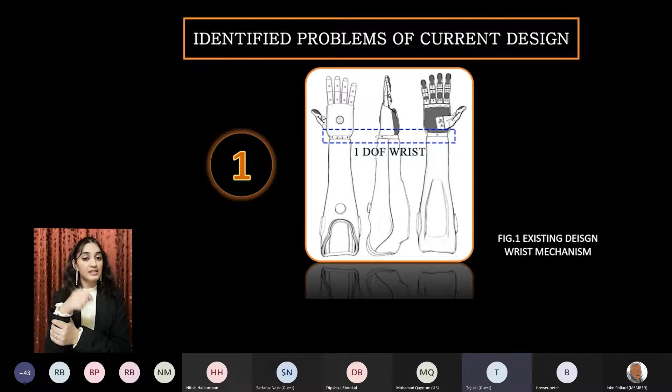Second problem that I identified was the thumb. Thumb plays an important role. As you all know, we can grab or grip anything with the help of this thumb. But if this thumb is not having a good grip strength, a lot of things are not done. So you completely become dependent.

And the third problem was the tendon cables. This is having its own pros and cons. It's easy to achieve a mechanism where you can do this close and open, but the long cables involved inside have power transmission loss. Because of this power transmission loss, there is some kind of force imbalance, and that might lead to gripping power or gripping strength that could be not as strong as a normal human hand.

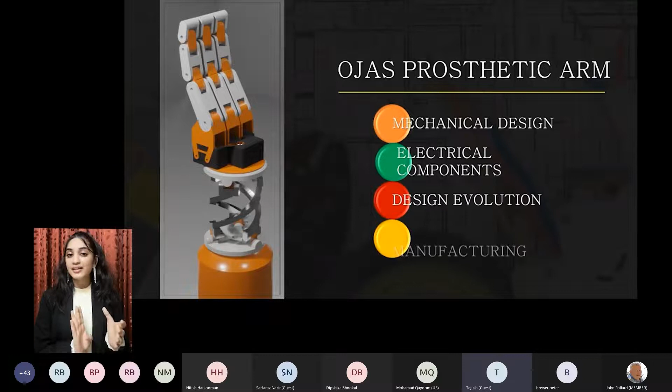So these are the 3 identified problems from the low-cost prosthetic arm. To come up with a solution is what we are having here, the Ojas prosthetic arm. Under this, we have 4 categories. We'll be focusing mainly on the mechanical design, electrical components, then we have the design evolution, and finally the manufacturing. From all these things, we can identify what is the improvement from the Ojas prosthetic.

To start with, we'll start with the mechanical design. We are mainly focusing from below the elbow. That's why we have wrist and finger mechanisms considered in this case. So this is completely based on mechanical design.

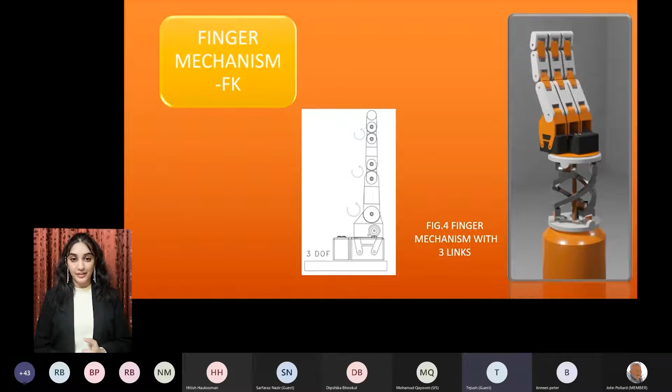Finger mechanism is basically, instead of going for a tendon cable, how about we go for a 3-link mechanism? By using a 3-link mechanism, it is easily achieved to get 3 degrees of freedom. So this is how it will look like, and this 3 degree of freedom is achieved by actuators that's placed in the bottom. These actuators will help in the forward kinematics mechanism.

Now you might wonder, there's only 3 fingers. Where is the 4th and 5th finger? Well, to give you an equivalent mechanism just like the thumb, we're going for this mechanism called the shift mechanism. In this shift mechanism, there is a servo motor which is connected to only 1 finger, and this finger has freedom to move from 0 to 180 degrees. It will easily help you in grabbing or gripping anything, for example holding your laptop, or maybe carrying a bag, or opening a door can be easily achieved by this.

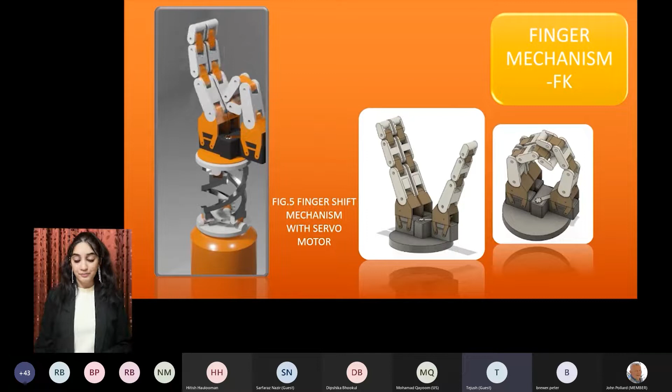Next is the wrist mechanism. In this wrist mechanism, to replicate exactly like a human arm, after a lot of literature reviews and research, I've come to the conclusion that a quaternion joint would be the best one.

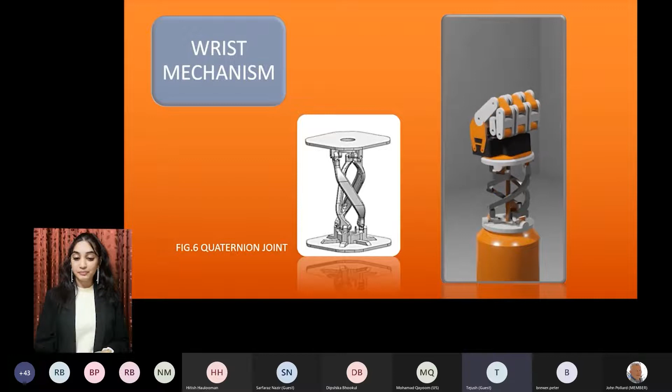The quaternion joint is compact and completely based on rolling motion, which easily helps us achieve 2 degrees of freedom - that is, rolling at the same time as turning around. This helps us achieve front, back, and sideways motion just like a human hand.

Coming to the next point, the electrical components. We start off with a power source, exactly like a mobile phone where you have to charge it. We use lithium batteries here - chemically safe, long lasting, and fast charging. Compared to a lead acid battery, this is 60% lower in weight, so we prefer lithium over lead acid batteries.

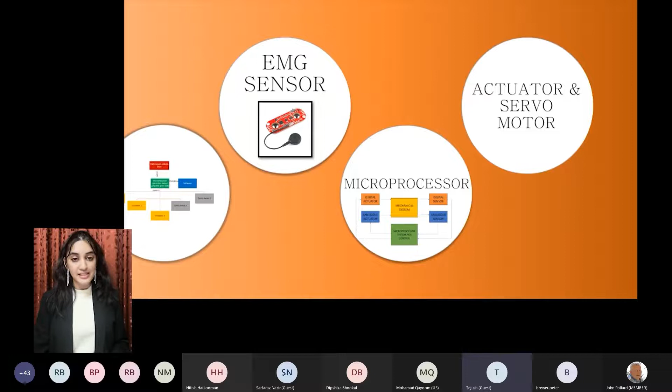The next one would be the workflow. I've explained the finger and wrist mechanism, but how are they going to work? It's with the help of the electrical components. We have a sensor that senses all the signals from the muscle, which will be given to the microprocessor, and that will give the data to the actuators and servo motors.

The sensor being used is basically an EMG sensor, electromyography sensor. This sensor can easily detect the muscle signals. The muscles always have signals that come from the brain with the help of nervous signals. The nervous system helps us get all these signals to the end of our hands or legs according to our need. So this will detect these signals and give it to the microprocessor.

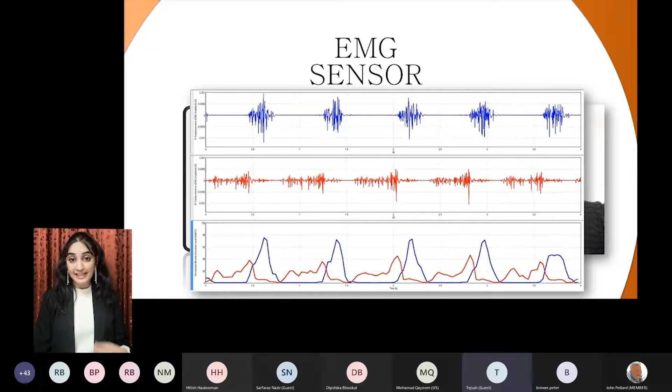So these are a couple of graphs that explain how it has been detected. For example, the first one is the walking motion, running motion, also while eating or writing. This is how it looks like - this is an even deeper study between the amplitude and the time consumed for each signal.

Coming under the microprocessor, this is basically a chip that has software installed. It can easily take the information from the EMG sensor and give it to the actuators and servo motors according to the requirement. Next is the actuator and servo motors.

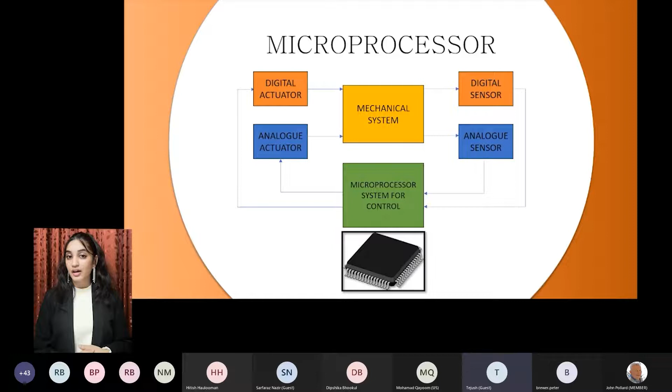I've explained that fingers use forward kinematics, so we have actuators placed there. For the servo motor, it basically involves inverse kinematics, which comes in wherever we have the twist. One servo motor is placed under the finger, which gives us the shift mechanism, and another is placed under the wrist mechanism - that's why we have another servo motor there.

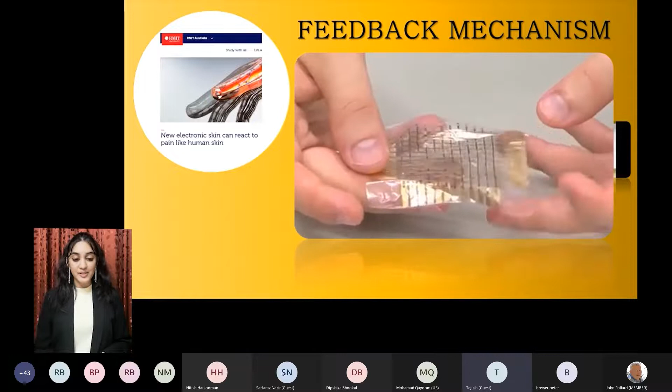So that comes to an end for the workflow. And then finally, we'll come to the feedback mechanism. There are a lot of ways nowadays that we could get a feedback mechanism, either by implantation or some other concept.

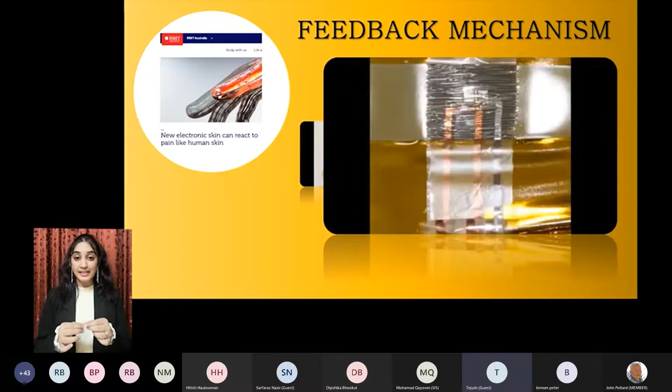RMIT University from Australia have found a new concept using electronic skin. This is a particular skin made up of electrodes that can be expanded or compressed according to the need. This skin can easily detect any kind of force, temperature, and sharp objects towards it, and can give the signal back to the microprocessor. It is as light as a feather - this is one of the advanced technologies giving you the sense of touch.

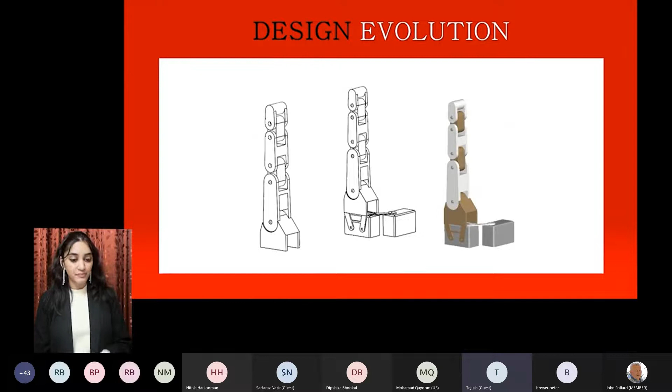Coming to the design evolution, this is how the design evolution happens - from the finger to the servo motor, then how it was placed into 3 fingers, achieving forward kinematics at the same time as inverse, and also choosing a particular wrist joint, that is the quaternion joint, and coming to a final rendering view.

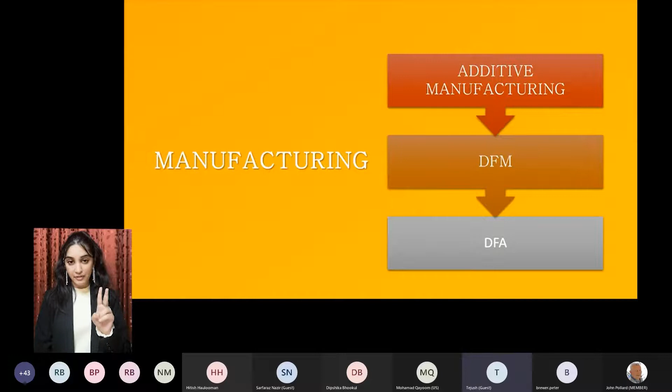Coming to the manufacturing side, we have 3 different types - one is additive, then DFM, then finally DFA. The additive manufacturing, basically 3D printing, is what we have chosen for our manufacturing concept. The reason is it's one of the most essential and nowadays a fast moving method. For example, the mouse which I'm using here is also a 3D printed one.

The next one is DFM, design for manufacturing. We will not be printing the entire thing together, so we're going to split it into different parts and print it.

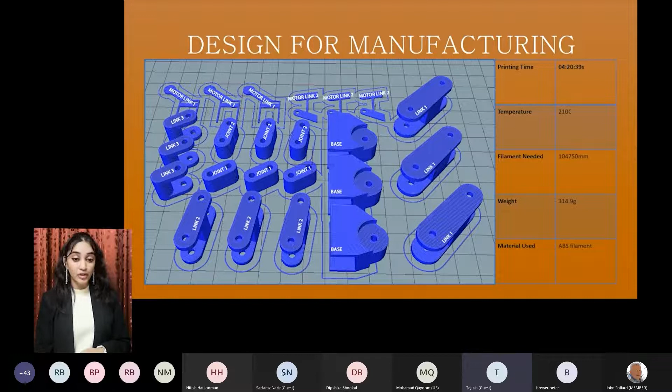This is basically the structure for the finger mechanism, showing all the finger parts. And this is for the wrist, all the wrist joints, showing how it will be split up and printed.

And finally, DFA, design for assembly. All the manufactured components have to be assembled together to get the final product, and that's what happens in DFA. So that comes to a conclusion for manufacturing.

Let's discuss the results. ANSYS is the software I used to arrive at this conclusion. The finger we chose has a capacity of 500 Newton, so it can easily lift it.

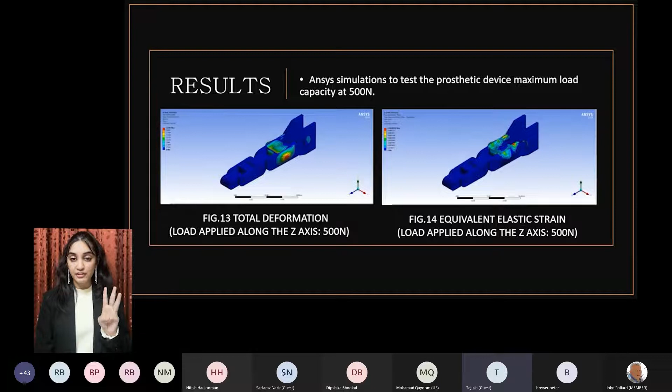500 Newton is basically 50 kgs, so a finger could easily lift 50 kgs. That means 3 fingers together can lift around 150 kgs. Quite amazing, isn't it?

To see the improvements in degree of freedom, the earlier tendon cable design had a lot of problems. Here, we have given 3 degrees of freedom, and the wrist mechanism has been increased. Power loss has been reduced by removing the tendon cables.

And finally, sense of touch, which was not there in the existing design, has now been created with the help of an electronic skin.

The cost estimation for our design is only around 1,389 dirhams, the currency used in UAE. In USD, that rounds up to about 400 dollars, which is way more economical compared to the $5,000 ones in the USA.

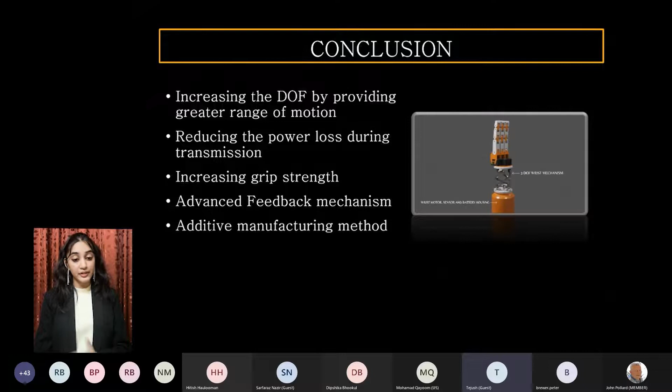Finally, we can come to the conclusion. We have promised you increased degree of freedom, reduced power loss through the mechanism shown, increased gripping strength with the shift mechanism, implemented an advanced feedback mechanism, and finally used additive manufacturing, the 3D printing concept.

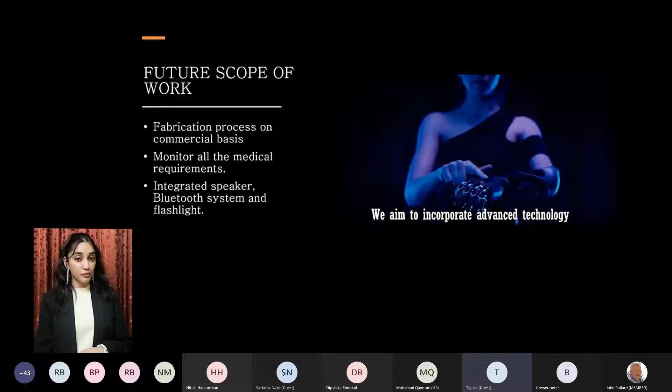Towards future scope of work, a lot more changes and updates could be made to this design. Fabrication for commercial purposes is quite different, so we'd have to design for that. Another main pro of additive manufacturing is that you can design according to a person, basically a customized way of fitting a prosthetic arm for an individual.

Monitoring medical benefits, like heart rate and BP, could also be measured, and finally integrated speakers and Bluetooth systems could be implemented in the future.

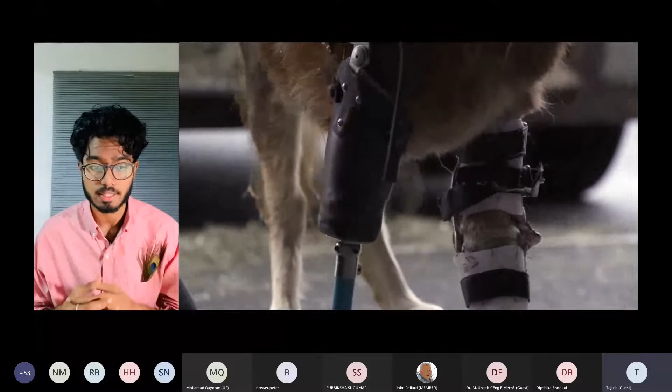Secondly, we have this endangered species of sea turtle. It's named Hofesh, meaning freedom in Hebrew. A green sea turtle was caught in a fishing net. Unfortunately, the turtle lost its flippers, front and back flippers.

So firstly, the engineers actually inspired themselves from a fish's dorsal fins and incorporated it in the turtle. Unfortunately, this was not the best solution because the turtle was not balanced properly. And then there came the concept of reverse biomimicry, where the scientists used existing technology from this raptor warplane, and they chose it and placed it in such a way that the turtle would regain balance.

Now we go back to our dear canine friends. You can see T.R. Short contributed to the history of animal prosthetics by constructing a mobile cart which would enable an animal affected by posterior paralysis or related conditions. The cart would enable the affected animal to move in a way that was balanced and completely self-propelling.

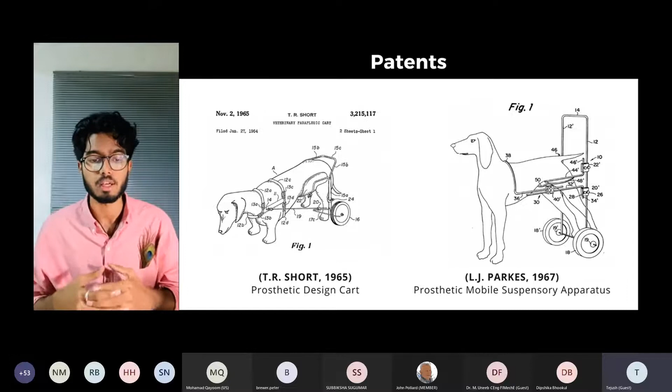And you can see the different components. There were mainly secured straps, buckles, and a U-shaped frame. For the L.J. Parkes model, it contained a hip support member, connected together in cross arms and an upper end to the cart, also a transverse axle between the wheels mounted on the bearing. The lower clamps and the upper ones are used to adjust the shaft.

In the first existing model, you can see the partial limb prosthesis. The upward silicone socket is made using mold casting, and straps are used to tighten the prosthesis so it does not detach. The part that touches the ground is accommodated with rubber to absorb shock. The type of prosthesis shown can be used only for mid-radius amputations, as we told earlier, the different levels of amputation. The canine would have to already contain the fixing area to fix the prosthesis.

The second existing model is a front limb wheelchair for a canine named Derby. It's actually not the ideal solution. Unfortunately, the wheelchair would get stuck in deep terrain because of the imbalance of the design, and it was difficult for Derby to maneuver. So they came up with a second model for Derby, a biomimicry 3D printed dual front prosthesis for underdeveloped limbs.

Unfortunately, the prosthesis was of low level, and this created unwanted strain and stress on Derby's backbone. As you can see in the video, Derby had to curb while running.

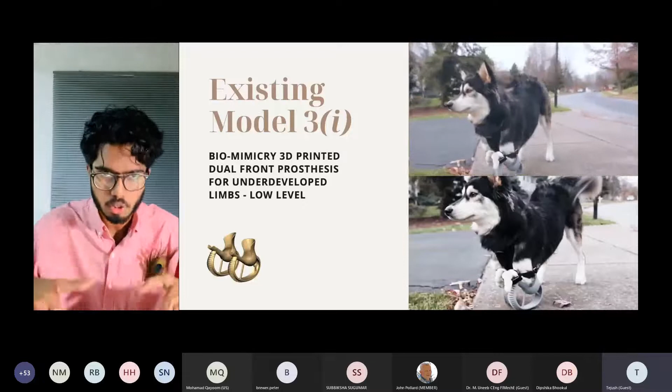And finally, they got to create the perfect 3D printed biomimicked prosthesis for Derby with a dual front limb prosthesis. They just had to raise the rubber prosthesis, and this remediated the fact that Derby's back was not straight. As you can see, Derby is running perfectly. And this prosthesis was for front limb deformity, curved deformity. As you can see, Derby's elbows are still here.

The fourth existing model is about percutaneous fixation to the skeleton. What is it? It's really interesting actually, where we get really diving into the biomimicry. So the first part of the element is fixed into the skeleton of a moving bone, and this is implanted into the bone, allowing normal gait, the canine's locomotion, without limping. And this is actually connected to the exoprosthesis, and the exoprosthesis is the part that is maintained and changed if needed for this existing model.

The PerFiTS is actually a state-of-the-art technology used for this kind of canine, which is really costly, unfortunately, because the material, mainly titanium, is used.

We identify the customer needs, mainly the product life and durability, ease of use, the space occupied, the maintenance, safety. One of the most important parts that our customer pointed out was the weight of the product and how to use the prosthetics, because Mauritius is not used to such a product.

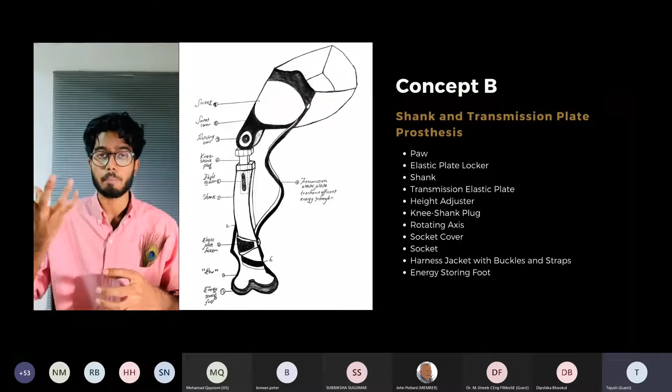The canine does not have the upper part because we are mainly considering a canine without the attachment, whereby the amputation was done completely for the whole leg. This is how the shank and transmission plate prosthesis is attached to the canine, and the transmission plate is used to absorb shock.

It mimics the muscle of the canine. As the weight of the canine increases during the gait, the transmission plate gets compressed, and as the weight decreases, it gets retracted. So the plate has elastic properties, which helps it transmit reactive forces smoothly to the socket connection. This is how we mimicked the muscle - the metallic part mimics the bones, and the elastic part mimics the muscles.

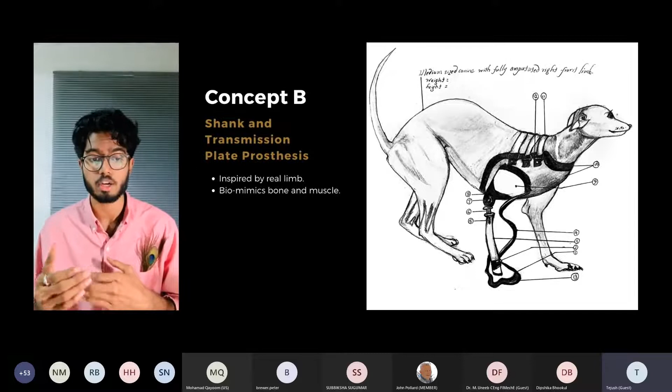The knee shank plug would laterally rotate the knee joint of the canine, in such a way that when the canine moves, it won't disturb the canine from properly getting its gait right. The energy storing foot is a component designed to be triangular based for maximum stability compared to other architectures.

We have the final concept, concept C, which is a 3D printed two-piece prosthesis. The inner geometry acts as the muscle - it compresses and retracts. The elastic plate is also elastically compressible for proper weight distribution.

Unfortunately, it's not the ideal concept because when fixed to the canine, it would just act as a stationary component, a stationary structure being there, quite much preventing the canine from moving.

For material selection, we chose polypropylene for the socket, nylon 66 for the elastic plate because we can use nylon 66 in 3D printers, and for the shank, plug and pin, we chose aluminum alloy.

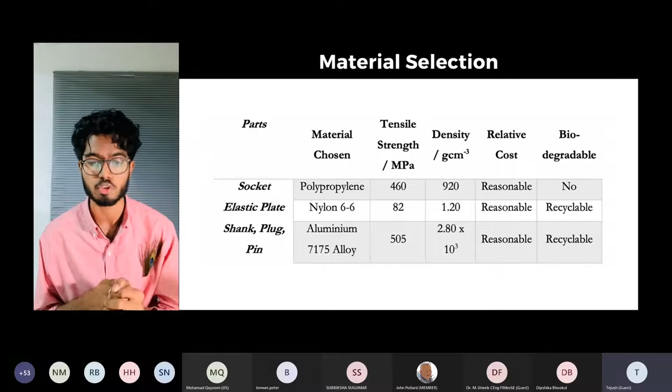The safety aspects are important to consider for any types of design, any types of products, especially when this product is not recognized for the market.

The owner must take care whether there are slippery surfaces, and must know how to use and how to maintain the canine prosthesis. Also, collision or malfunctioning of the prosthetics, or rejection of the prosthesis might occur in case it doesn't appear quite compatible with the canine's feelings. So loose attachment of the prosthesis is also a safety aspect we need to consider.

We have shown that the weight distribution of the canine is actually 25 kilograms as a whole, but 30% is distributed in the front limb. So one front limb contains 30% of the 25 kilograms. So 25 times 0.3 times 9.81, we get 73.575 Newtons acting on this member.

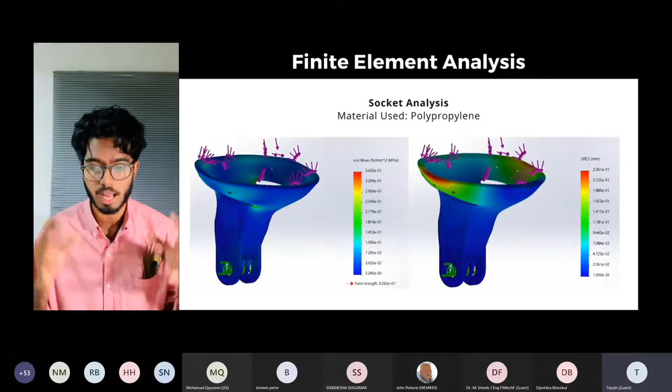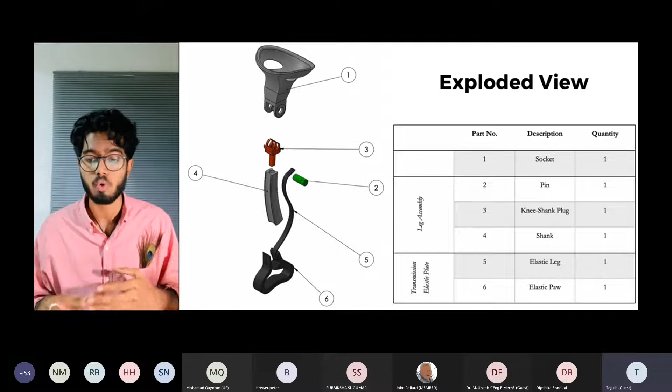We chose SolidWorks to make the drawings, and you can see an exploded view of the socket, which is harnessed to the canine's bottom part. The pin is connected to the socket, the knee shank and the shank itself connected through the pin, and all of those are joined together like a sandwich, with the elastic leg and elastic paw fixed to the whole structure.

It's important to consider the environment always when we design anything for anyone. So the life cycle assessment showed that the manufacturing part is really consequential for the carbon footprint because of the aluminum we are going to use. Thankfully, the aluminum can be recycled and used for a later stage.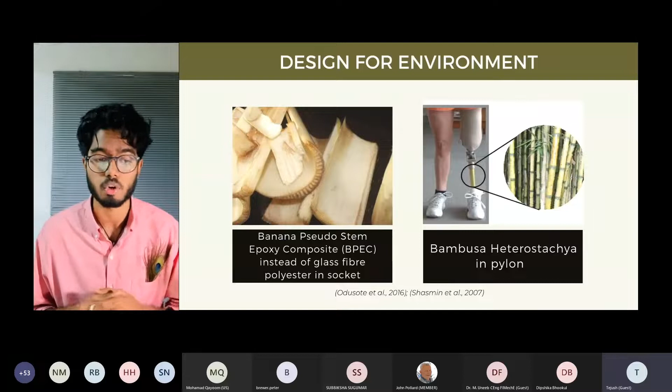An improvement in terms of environment could be to use banana pseudostem epoxy composite instead of glass fiber polyester in the socket, and also to use Bambusa Heterostachya in the pylon, which has a high tensile property of 341 to 530 megapascal, resembling the shank properties. The main disadvantage is that bamboo cannot resist for more than 3 years due to deformation, but further studies are being done to look into how to treat bamboo for it to become more durable.

Limitations and improvements: we have a limited market, limited specific customers. Anyway, it is designed for a humanitarian purpose especially. So design for age - as the canine gets bigger, we'll have to change the socket and everything to proportionately match the canine. And how far is one inspired by nature to design for nature.

When we design for nature, we must take into consideration the carbon footprint left behind. The biomimicry is inspired from nature, from the natural construct of the bones of the animal. But the carbon footprint left behind does not really mean that we are designing for nature. So we have those solutions for bamboo and banana research going on.

And finally, the philosophical aspect can be a limitation too - are people ready to accept such a product in Mauritius, for instance. Finally, I would end with this note: as future mechanical engineers, I believe we have to know our purpose and ask the question why we are doing what we are doing.

So the inspiration behind this design project was my best friend, actually - my best friend named King, who was diagnosed with cancer and a tumor in his right front limb, and we had to amputate. I remember my parents, the philosophical aspect, the mindset not ready to amputate, but rather to resort to euthanasia. But we fought - philosophical clash at home. So we fought to keep my best friend alive, and he got a second chance at life, and it is for him that I chose to design the prosthesis.

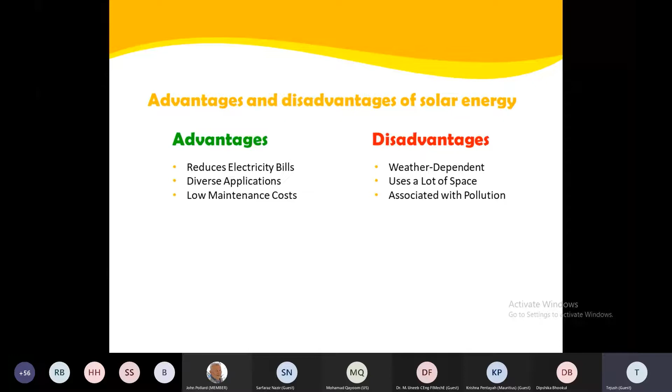There are several developments in each renewable energy source in 2020 according to latest statistics. Major capacity increases are in China, 49 gigawatts, and Vietnam, 11 gigawatts. Also, US added 15 gigawatts. Japan added 5 gigawatts. Both India and the Republic of Korea increased solar capacity by more than 4 gigawatts.

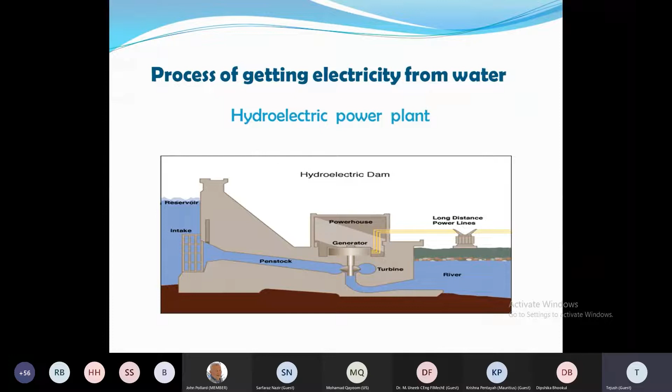Now I will talk about water energy. Here is the picture of the process of getting electricity from water. People use dams to block the water's natural flow. When the water is released, the pressure behind the dam forces the water down the pipe, which is called the penstock. This causes the turbine to turn, and as a result, the turbine turns a generator, which makes electricity.

As a first disadvantage of hydropower, dammed water sources prevent fish from reaching their food, which is important for them, and has a bad impact on fish. Although the generator doesn't produce emissions, reservoirs that are man-made lakes emit harmful gases such as carbon and methane. When dams are built at higher levels, they may cause serious problems to any town nearby that's below it. While these dams are built very strong, there is still risk of flood.

As the world broke its record in 2020 by developing renewable energy sources, there are some developments in hydropower also. Growth in hydropower recovered in 2020, with the commissioning of several large projects delayed in 2019. China added 12 gigawatts of capacity and Turkey 2.5 gigawatts.

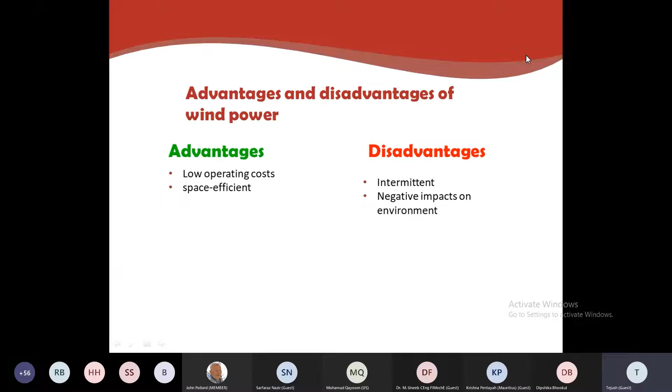Geothermal power plants use this steam to produce electricity. The steam rotates a turbine that activates a generator.

Binary cycle power plants operate on water at lower temperatures of about 225 to 360 Fahrenheit. In this power plant, two types of liquid are used unlike other steams. Binary cycle plants use the heat from the hot water to boil a working fluid which has a low boiling point.

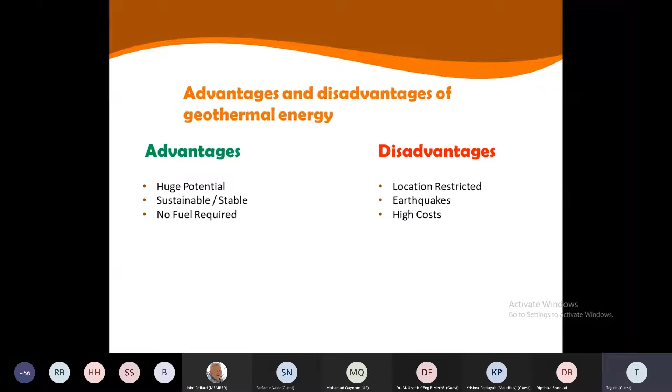Now I will give a little information about improvements in geothermal energy. Very little capacity was added in 2020. Turkey increased capacity by 99 megawatts, and small expansions occurred in New Zealand, the US, and Italy. The reason behind such a little increase might be the number of specific locations where this energy resource is accessible.

This energy source doesn't produce carbon dioxide because it's carbon neutral. Carbon neutral means that carbon that's released by burning biomass was already part of nature, therefore it cancels out.

Biomass energy can be converted into many different fuel sources, each of which has varied applications. For instance, biomass can be processed to create biodiesel for vehicles. Biomass fuels are abundant also. Much like with the sun and water, they can be found practically anywhere on the planet, and this guarantees that people will not run into the issues we have with fossil fuels.

Burning biomass creates pollution of a number of different compounds other than carbon dioxide. Even though it's renewable energy, it's hard to claim that it's totally green. Biomass also leads to deforestation. It's also not as efficient as other energy sources, such as fossil fuels and nuclear energy. And the final problem is that it's expensive.

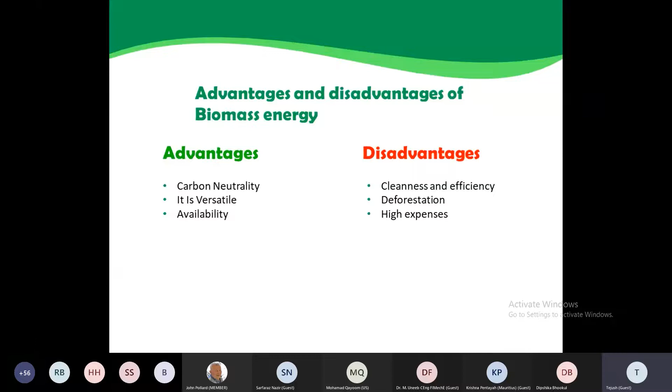Now I will give information about Azerbaijan's renewable energy. Azerbaijan is a country with huge potential for renewable energy development. The country offers abundant wind and solar resources, as well as significant potential of biomass, geothermal, and hydropower.

The geothermal sector has set a goal. The government has set a goal of adding 420 megawatts of renewable energy capacity by 2020. As a result of this goal, the country has begun to deploy renewable energy projects via engineering, procurement, and construction.

Azerbaijan's technical solar power potential is around 23,000 megawatts. The best resources for solar energy are in the central river valleys and in the north and northwest of Azerbaijan.

Hydropower is currently Azerbaijan's primary source of renewable energy, but its potential has not been fully exploited. According to the Ministry of Energy, the technical potential for small hydropower is 520 megawatts. Azerbaijan's geothermal energy potential is estimated to be up to 800 megawatts. Initial studies indicate that Azerbaijan has 11 geothermal zones with water temperatures ranging from 30 to 100 degrees.

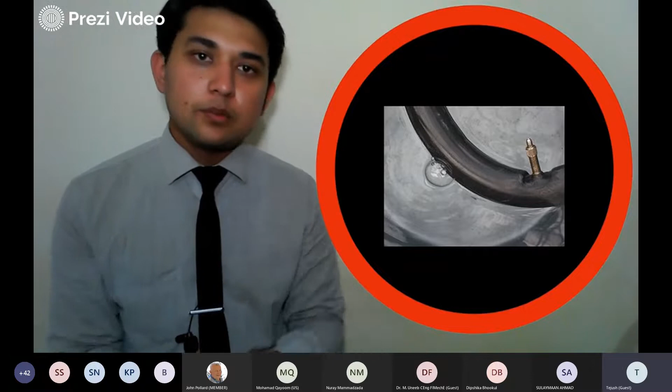Falcon-X is basically a device used for testing leakages. In the first stage, the sample is subjected to vacuum, and in the second stage, the sample is subjected to pressurized helium. Primarily, the sample is subjected to vacuum to create an optimized and effective condition for helium to get inside.

Subjecting it to vacuum in the first stage will create a sort of negative pressure inside the sample if it has a leakage in it. In the second stage, when it is subjected to pressurized helium, that negative pressure will allow the helium to get inside the sample more easily, and we will get clear results.

The device has a vacuum gauge and a pressure gauge for monitoring vacuum in the first stage and pressure in the second stage. As far as factor of safety is considered, while doing our calculations for reasonable parameters like volume, pressure, and weight, an extra factor of safety was kept.

All of these parameters totally depend on the thickness of the material we are using. By default, when we visited the market, fortunately we got materials that actually had 4 times more thickness than what was calculated by us. So no compromise has been made on quality, safety, and accuracy.

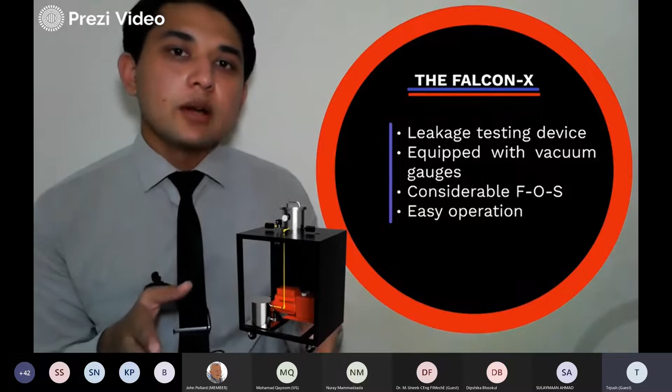Coming to the working of Falcon-X, that is actually the trolley, and the system is packed inside the trolley except for the chamber. Up top right here is the chamber. The sample will be loaded in this chamber.

Packed inside that trolley is the buffer. That right here is the buffer, and on the side of the buffer in red color you can see the pump used for creating vacuum inside this chamber. The pump is directly connected with the chamber, and the buffer is also connected with the chamber for providing pressurized helium. The buffer contains pressurized helium to supply to the chamber in the second stage, and the pump provides vacuum to the chamber in the first stage.

Now coming to the chamber, on the top there is a lid right here. The lid is removed, the sample is loaded inside the chamber, and the lid is closed. In the first stage, the sample is subjected to vacuum provided by the pump, and in the second stage, the sample is subjected to pressurized helium provided by this buffer.

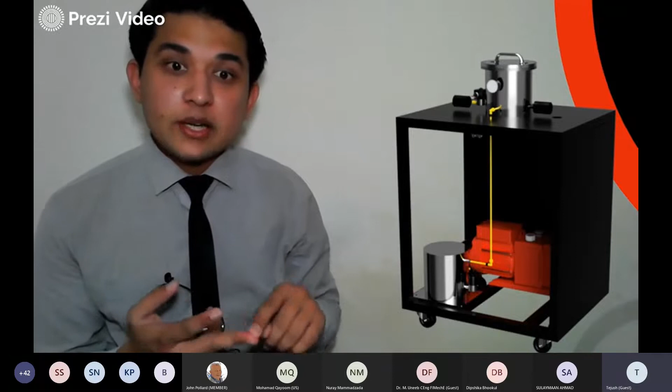This buffer provides the chamber with pressurized helium, and after that the lid is again removed, the sample is taken out and placed in the helium detector. If the helium detector detects helium coming out from the sample, it means the sample is faulty; otherwise it is good to go.

Basically, Falcon X has three parts. Up top is the chamber for loading the samples. Placed beneath the chamber, packed inside the trolley, is the buffer that is connected with the chamber for supplying pressurized helium. And the third part is the vacuum pump that actually provides the chamber with the vacuum needed for stage 1.

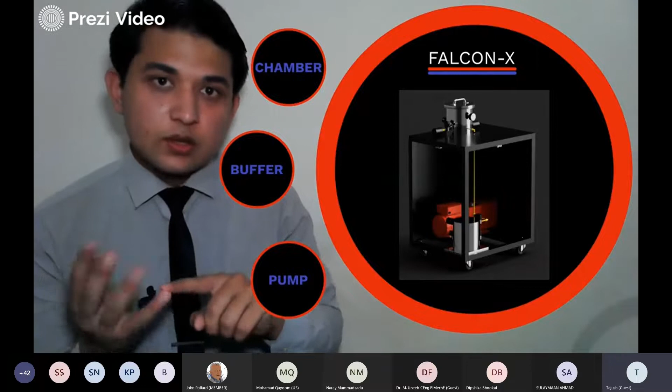Samples are loaded inside the chamber. The chamber is made of stainless steel and has two gauges on it: a vacuum gauge and a pressure gauge, for monitoring vacuum in the first stage and pressure in the second stage. Considering the interior design of the chamber, it involves two removable meshes. These meshes serve a great purpose for testing multiple samples and also for accommodating irregularly large sized samples.

For example, if we come across a sample that is quite larger in size and has an irregular shape, we can remove the meshes and place the sample inside the chamber and test it. On the other hand, if we come across regularly shaped small sized samples, we can place multiple samples on the meshes and test multiple samples inside the chamber at a time.

The purpose of the buffer is to provide the chamber with a controlled supply of pressurized helium. It also provides the chamber with multiple refills, and like the chamber, the buffer is also made of stainless steel with a pressure gauge on it.

Now a question arises: why are we not directly using a helium cylinder instead of a buffer? The answer is quite simple: controlled supply of pressurized helium. We know that the chamber is again and again subjected to vacuum and pressure. Due to this, a cyclic stress is produced. And if the chamber is connected directly with the helium cylinder, the value of this cyclic stress would be much greater, as the chamber is again and again hit by large pressure. That would be very damaging to the life of the chamber.

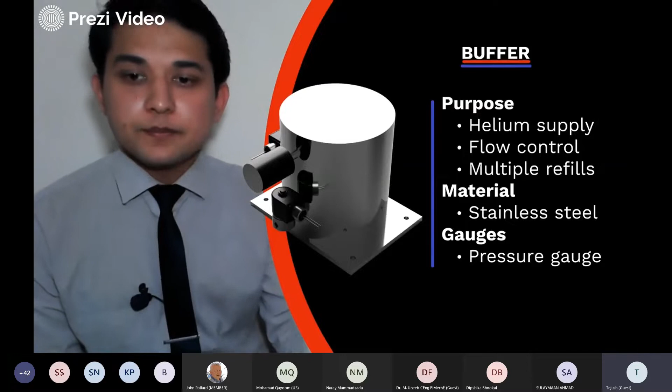Packed inside the trolley alongside the buffer is the pump. This pump is directly connected to the chamber via a pipe. The main purpose of this pump is to provide the chamber with a vacuum for stage 1.

Some of the components involved are pressure gauges, delicate vacuum gauges, pipings and fittings, trolley, and some of the processes involve CNC machining also. So the present cost of the device is almost 5 lakh rupees. Some applications do not require that much accuracy, so the cost of the device can range between 3 lakh to 5 lakh rupees. However, if mass production starts, the same quality device, presently costing 5 lakh rupees, can be reduced to 4 lakh rupees.

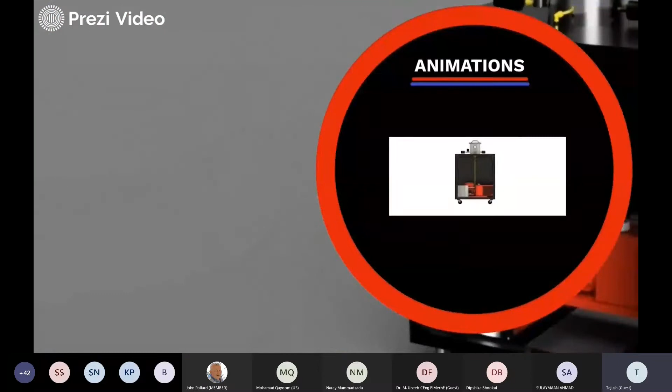First of all, the sample is placed inside the chamber. Then it is subjected to vacuum. Afterwards, it is subjected to pressurized helium from buffer to chamber. The sample is taken out, and then the sample is placed in a helium detector for detecting any possible leakages.

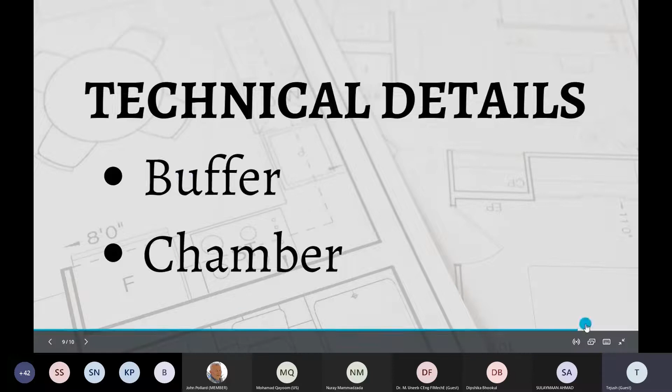This is the 3D model of the buffer. This is the orbital view of the buffer. This is the exploded view of the buffer. The exploded orbital view of the buffer.

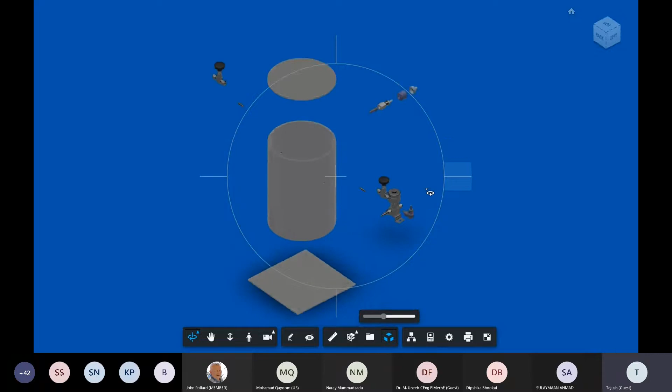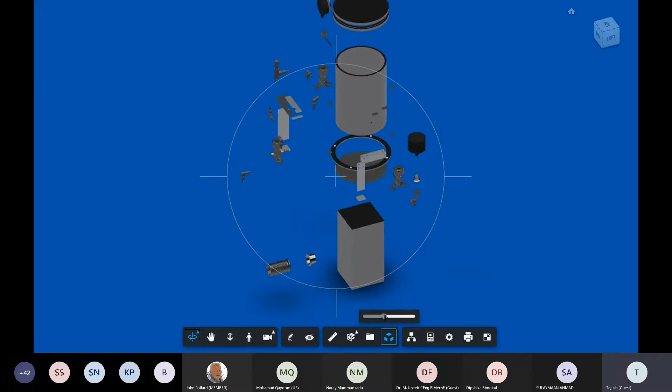Now for the whole assembly, this is the model of the whole assembly, the orbital view of the whole assembly, the exploded view for the whole assembly, the exploded orbital view of the whole assembly.

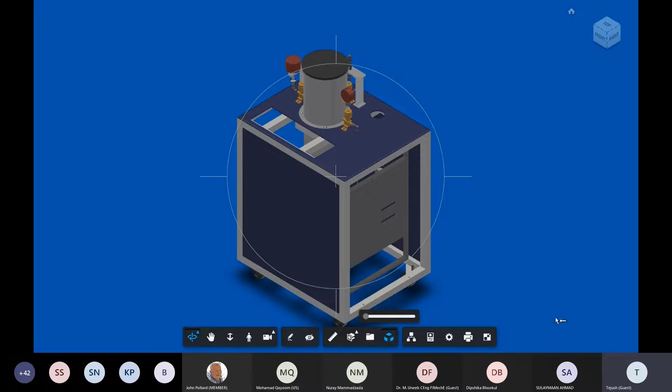This is the 360 roundup for the device, the Falcon X. I know my video making skills are not that good, but it's just a request to please bear with it.

The device finds its application in the aerospace industry. As discussed in the first slide, ejection seats use a capsule that contains explosive. These capsules can be tested with this device. Some military equipment can also be tested with this device, of course, if you want to avoid an unexpected blast. The automotive industry has some airtight shock absorbers that can also be tested with this device. In electronic components, some components like thermostats and switches can also be tested with this device. And in packaging, especially medicine packaging where moisture is seriously avoided, this device can play an important part.

The device does not interfere with the geometry of the sample that is to be tested. There is no need to disassemble the sample before testing it, so it is non-destructive. It is quite user-friendly as anyone can easily operate it after reading the instruction manual. The device is sensitive since it involves some delicate vacuum gauges. As far as its accuracy is concerned, it is very accurate.

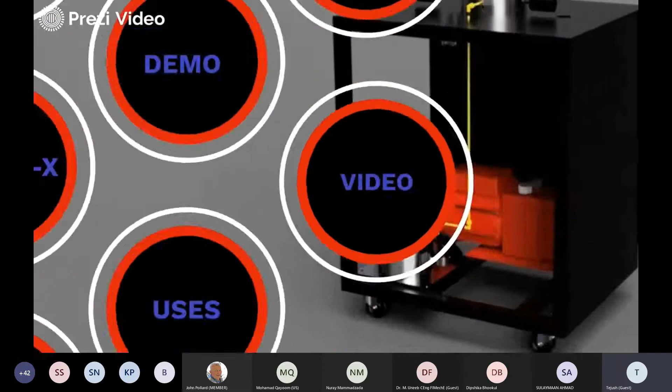Well, that was all from my side. Thank you so much for your time and patience for listening to my presentation. Questions, please.

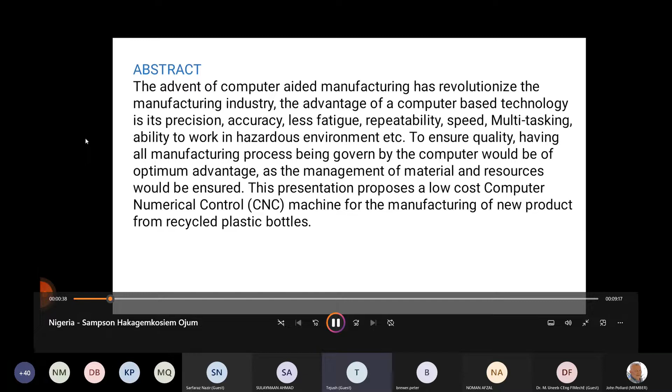The advent of computer-aided manufacturing has revolutionized the manufacturing industry. The advantages of computer-based technology are precision, accuracy, less fatigue, repeatability, speed, multitasking, and the ability to work in hazardous environments. To ensure quality, having all manufacturing processes governed by the computer will be of optimum advantage, as the management of materials and resources will be ensured. This presentation proposes a low-cost computer numerical control machine for making new products from recycled plastic bottles.

Now, what is quality assurance? Quality assurance can be seen as a management method that entails all planned and systematic actions needed to provide adequate confidence that a product, service, or result will satisfy the given requirements for quality and be fit for use.

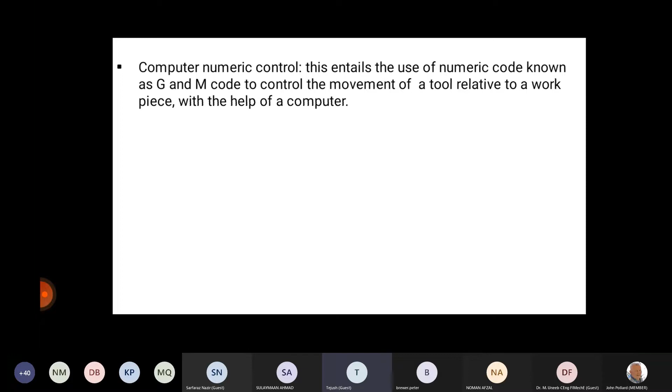Before now we had conventional lathe machines, which were mechanically, pneumatically, or electromechanically operated. But now these machines have been embedded with computer systems, making them smarter and more programmable.

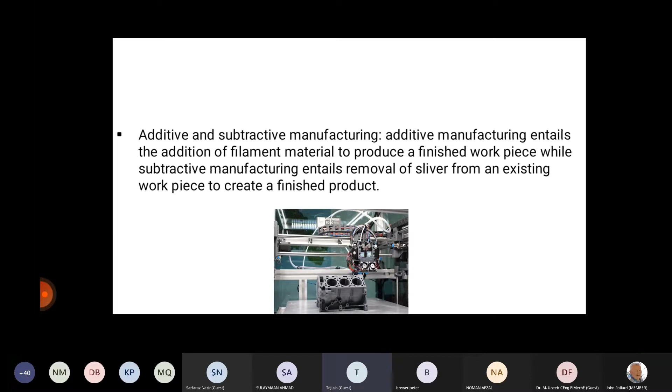So computer numeric control is of two types: additive and subtractive manufacturing. In additive manufacturing, filament materials are added to produce a finished workpiece, while subtractive entails removal of material from an existing workpiece to create a finished product.

Additive manufacturing is more economical because there is less waste compared to subtractive, where more material is wasted because it's being cut out.

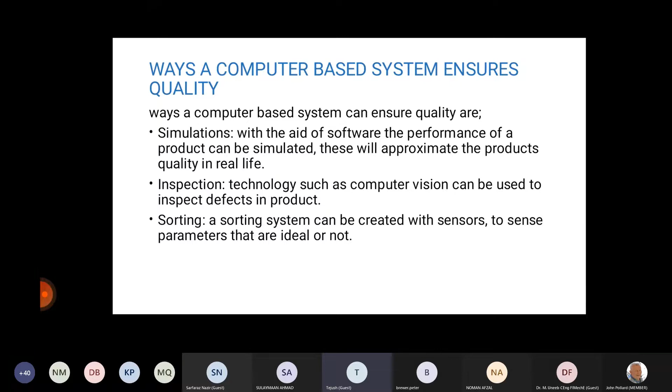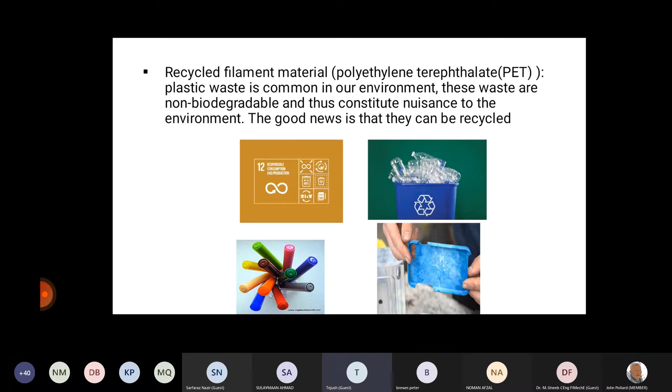This plastic bottle is an example of a material that can be recycled and is littered everywhere in our environment. So we could recycle it with the aid of a 3D machine. We could make various products, like the pens and foam pouch you see there.

Now, the major problems that prompted this proposal are the rate of plastic pollution and the quality of products and services. Plastic pollution is common and is really constituting a nuisance to the environment.

The aim of this presentation is to propose a cost-effective way of assuring quality through computer numeric control. The objectives are to illustrate the...

economic and environmental impact of computer numeric control, illustrate how to build a low-cost 3D printer, and illustrate how waste plastic can be recycled to filament material for 3D printing.

Economic and environmental impact: economically, it saves costs, ensures quality, increases productivity, and manages resources. Environmentally, it reduces waste, reduces pollution, fosters green products, and fosters sustainable development goals.

Now the materials listed include the software: the Arduino IDE for coding the microcontroller, SolidWorks for 3D modeling, the Repetier-Host for converting our 3D files to G-code, and the Slic3r software. These are the listed materials we used to achieve this.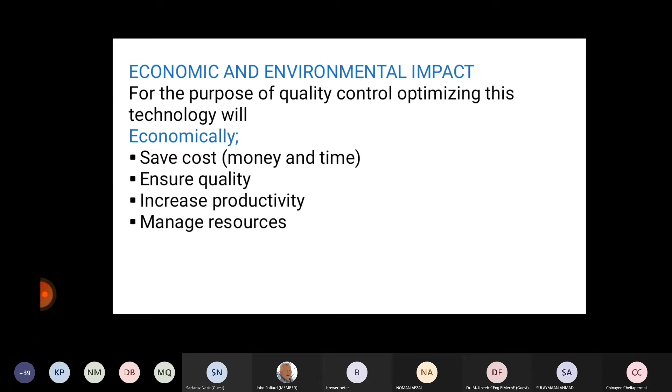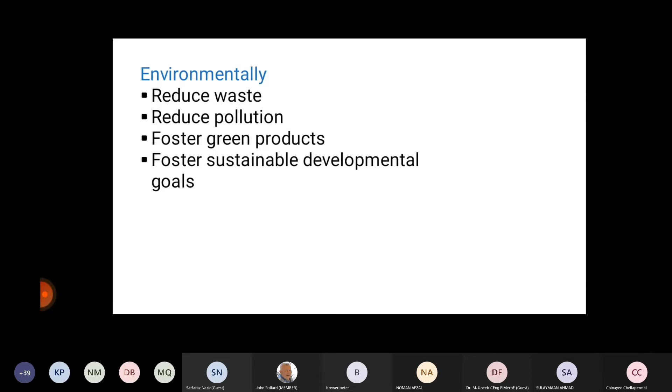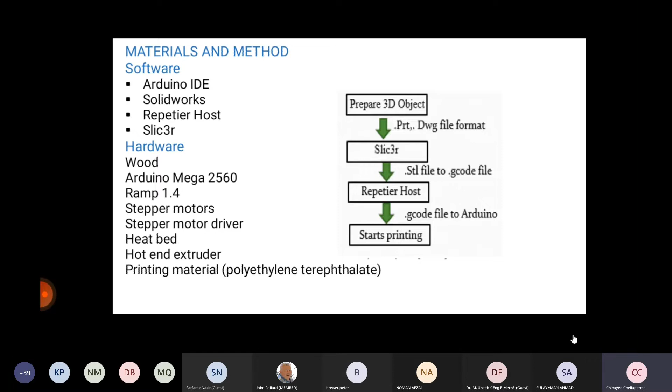To recycle the plastic into filament, the process includes collecting the plastic waste, drying the bottles, grinding and shredding them into particles smaller than 4 millimeters, preheating, extruding, spooling, and then 3D printing.

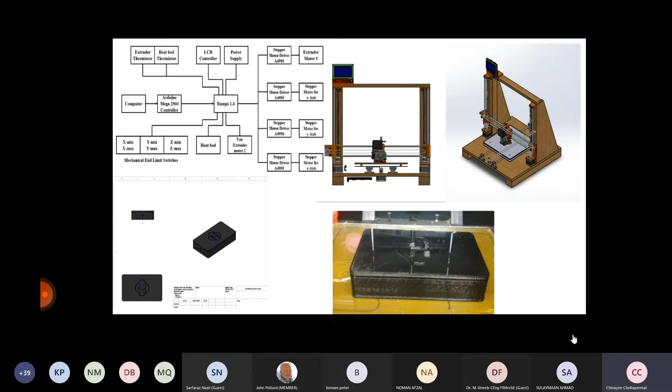You could see this is the block diagram of all the interconnectivities, and this is the proposed model, the CAD model of the proposed 3D printer using wood. And this is a 3D drawing which was later 3D printed.

In conclusion, the breakthrough of this technology has drastically improved quality of products and services. Unlike humans which are limited in senses, a computerized system can possess a variety of senses, and this is an advantage for fostering quality. Thank you.

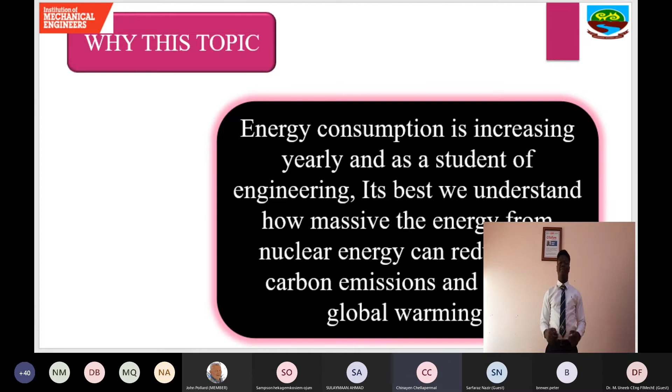This topic was chosen because energy consumption is increasing yearly. As a student of engineering, it's best we understand how massive the energy from nuclear energy can be, and we can use that to reduce carbon emissions, as fossil fuels is projected that by 2070 they might be depleted. So let's move on straight to what nuclear energy is.

Nuclear energy is the energy stored in the nucleus of an atom. Nuclear energy is released during nuclear fission or fusion. Nuclear fusion is the coming together of lighter nuclei to form a heavier one. Nuclear fission is the breakdown of nucleuses of heavier ones to form lower nucleus, and this happens with the release of energy in the form of heat, which is tapped to produce energy.

From E equals mc squared, you get to understand that the speed of light is huge, and then it is also squared. So a smaller mass can produce vast amounts of energy for our use. Mostly, the energy preferred in nuclear reactors or nuclear energy production is uranium and then plutonium.

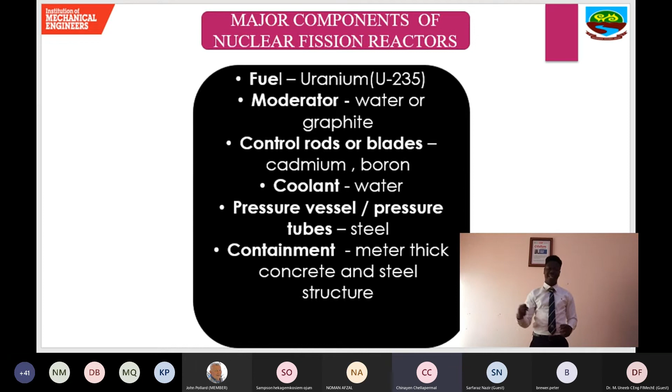And then we have a containment, a form that prevents the radiation from getting into the environment. That is called a containment. I'll show you a picture of that soon. And then we have the steam pipes, which are made of steel. They prevent the heat from getting into the environment, and control it in the direction to the turbines.

So we produce energy. We move on to the ways of generating nuclear power, that is from the nuclear fission reactor. The nuclear fission reactor is a series of machines that control nuclear energy production in a controlled way to produce energy in an output of electricity. This energy is controlled in a particular way so they can produce energy to us in the form of electricity, with steam pipes and other things in place to control the system.

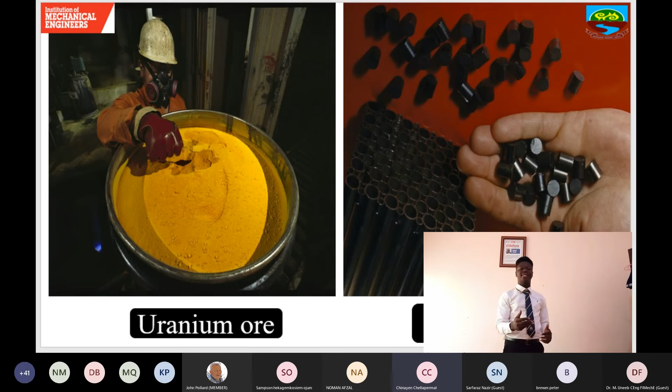You have the picture of uranium ore here. There's a yellow part the guy has dipped the cap into. It's a radioactive element, so you have to protect yourself before getting closer to it. Then they are stored as pellets of uranium oxide, as shown in the picture where the guy has one in his hands. When stored as pellets, they are safe to hold and use.

When they get bombarded, they release nuclear fission products. This product then produces energy. And when they release nuclear fission products and energy, the nuclear fission product also bombards other nuclei to produce energy in the process. This is called a chain reaction.

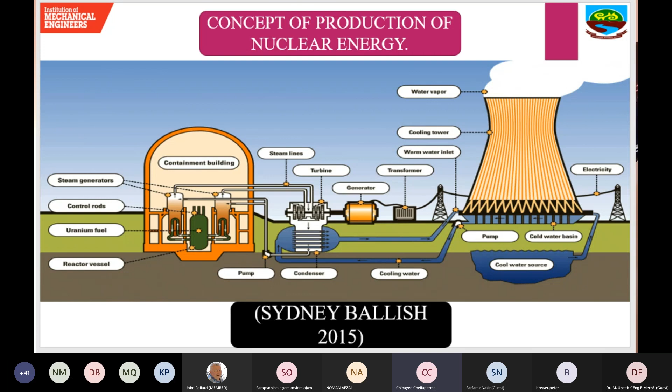It is continuous, so the heat produced in the process is transferred to water, heating it at high pressures and high temperatures, which according to thermodynamics, when something is heated, the pressure around it is also increased. So the water is moved at high pressure to the turbines and turns them at high speeds to the generator to produce electricity. This is the basic understanding of nuclear energy. The water then is then...